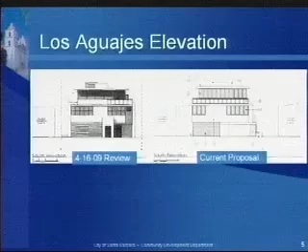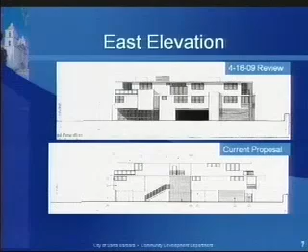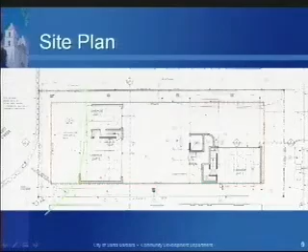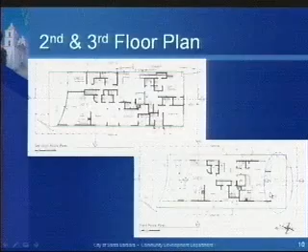And again, on the second floor plan, I'm still showing where the support column is here, and the stairway is at the easterly property line. On the third floor, I'm showing the encroachment of the deck and 3rd-story roof element that projects into that setback.

I just wanted to go back to the environmental review. We adopted a final mitigated negative declaration on April 16th, and with the implementation of the required mitigations that are outlined in that document that have been incorporated into the conditions of approval, all potentially significant impacts have been reduced to a less than significant level.

So staff supports the project, including the modifications, and recommends that the Planning Commission approve the project, making the findings outlined in Section 7 of the staff report, and

Thank you very much. The conditions in Exhibit A. Sorry, thanks.

Lastly, Pete, can we change?

The definition of neighborhood has been looked at in different ways during the course of our discussions on this project. The West Beach neighborhood, as defined by the general plan and the Historic Landmarks Commission, is along Shoreline Drive and Cabrillo Boulevard to City College, along City College to Cliff Drive, along Cliff Drive to Montecito Street, and then back to Chapala.

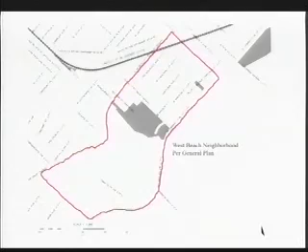That's one concept. While a smaller neighborhood, as defined by Policy 5.4 of the local coastal plan, is an area bounded by the half blocks between Castillo and Bath.

I believe Cabrillo Street. Cabrillo Street. I do know where I live.

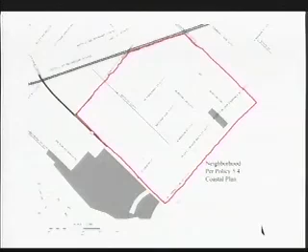Chapala and the north half block of Los Aguajes. However, it is my belief that the most intimate neighborhood, as defined in Section 1.1 of the Urban Design Guidelines, is the immediate adjacent developments

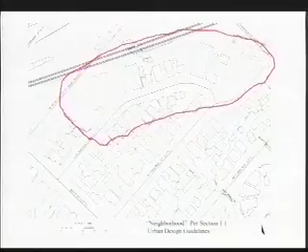And this, next plate, is a visual of immediate adjacent neighbors to my property.

Now, I'm pleased to present the project architect, Mr. Peter Allen, who will explain the architectural elements of our design solutions. I'll have a couple of closing comments after Pete's thoughts.

Thank you. Mr. Allen? Madam Chair, Commissioners, pleasure to be here today. I think we've come up with a solution that works for everybody, including us, which is great.

It's nice. Just in summary, I'll go through the site plan, show you where the modification occurs, and discuss how we worked with ABR, show you the amount of landscaping that we're doing, because I think it's impressive for this project. Quickly go through the floor plans just to show how we've integrated some items there. And then I have elevations of the building, 3D shots with and without landscaping, so we can see what the building looks like and then see how landscaping integrates with it.

One of the things we did, as Mark mentioned, was we added down in this area, and you'll see it on the landscape plan. This is the railroad lease area where we'll add additional landscaping and extend the creek buffer. But in essence, we've made the lot bigger and the building a little bit smaller.

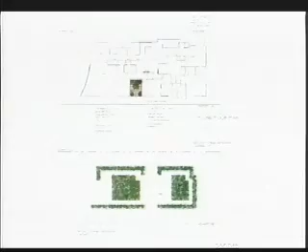Then up on the roof, we've got our green roof system. It'll be a palletized system around the perimeter. So if you superimpose this on that landscape plan, you'll see we've got a lot of landscaping involved in the project.

Second floor plan. I think what's important to note in the design is to look at the numbers. The size of the units hasn't changed; they're pretty much the same. What we've done is compress the building and made the center courtyard much smaller. We used to have two separate buildings that are now brought together. So the building is smaller. Maybe from a net number standpoint it's not, but from a physical standpoint, obviously it is.

What we have on all the units are foldable glass walls. This wall will essentially open all the way up, bringing the outside in, so this living area will essentially become a deck. There's real efficiency in the plan you'll see here and there, and on the third floor. Doing things like this, bringing those spaces together, really makes the architecture work, and you'll see in the elevations how it lightens up the design in the back.

Our focus on the design of these units, you'll see up on the third floor especially, is that the views are going out this way and this way. All the windows along this side of the building and this side are high windows for privacy.

Privacy is one thing that I forgot to talk about. Commissioner Larson especially asked about privacy in relationship to the apartment buildings next door.

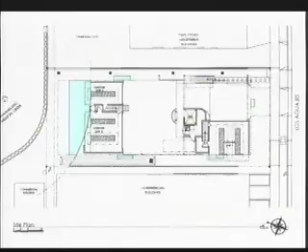And you'll see in the landscape plan, we've integrated landscaping along the side, bamboo and a large plant down the side of the stairs, to really get a privacy separation for this building right here.

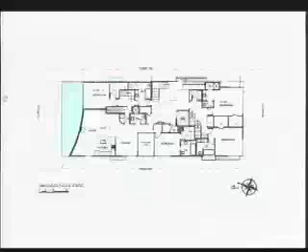This here is the protected patio I just mentioned in the landscape plan for unit number 3. This provides the acoustic separation required for this flat. These are modifications that we eliminated last time.

We had stairs on both sides; each unit would have its own stair. We've combined them now in the center of the building to eliminate those mods. It's not the most ideal scenario, and I still need to work on this, but it's certainly solvable, and we'll get it done.

Up on the third floor again, showing what our encroachments were before. This was a large planter. This is where this unit came out into what used to be a 15-foot setback, now it's a 20-foot setback.

So that's what we've gotten rid of. This area here is where, obviously, a mod is being requested — really for the use of the deck, not necessarily a building, because this could be a roof and it wouldn't require a mod. So it's specifically the use, and I think staff would agree with me on that.

And then up on the roof, we do have some roof overhang that goes beyond the 2 feet that's allowed. So those are them — those are the mods.

You'll see here on the third floor, just to emphasize, this is a glass wall that opens this area up, and this is a folding glass wall that opens this other area up. The view really focuses out this way, with the mountain view like so.

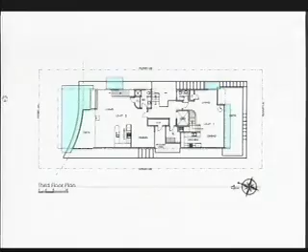So we have glass in this corner, as you'll see on the elevations, but it's set back — the footprint of the adjacent apartment building is back in this area. So privacy is something we considered the whole way along and have still maintained.

This enclosed patio is the acoustically protected area for this unit, and the acoustically protected area for this unit is on this deck here, because all the noise sources are back there, as long as you stay over here.

Roof plan showing how much green roof we have. This is the area we will have our photovoltaic system. This is where we have our roof access.

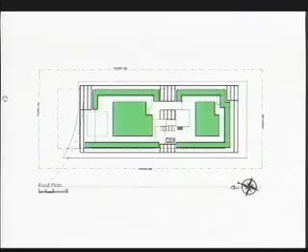The staff report, as part of the comments ABR had, was we used to have an enclosed roof access up here, making it easier to climb up and get these palletized green roof system up there. They just really pushed us to get everything off the roof, so we did.

We'll have to come up with an engineering solution. It'll be fun to figure out a way to get that to all work. But we did, at ABR's request, lower all that stuff.

Also kept the edge of the green roof back from the edge of the roof so we can maintain that nice thin line you'll see in the elevations. That's very, very important to this style of architecture.

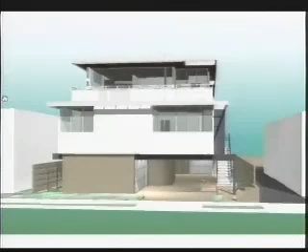So here we'll start off with the elevations, both with landscaping and without.

Working with ABR, they want us to reduce the amount of plaster mass on the front of the building. Used to come up here, and so we have made it much more horizontal now. There's our glass walls that open up.

This is translucent glass on the deck railing, so it provides privacy, yet still very light. We recessed the garage back about 8 inches to get a nice shadow line along here.

And what you can see here, it's important that you can look in this elevation, is we got a nice, good, pedestrian access. It's very obvious. It works. It ties in very well. Our spider leg comes across and frames it.

We were even able to get landscaping down here underneath, and also landscaping back here to really protect the view of those cars.

Coming down around the side, we have a fence running the entire length for privacy. Right here, that's the mod, half of the stair popping out. There's the decorative screen wall I was talking about that provides privacy from this courtyard area to the apartments adjacent.

But what the elevation shows is how we're able to really simplify this, refine it, and give it its apparent height really comes down by these very strong horizontal lines that we've got.

And this is what it looks like with landscaping. We'll have a nice large plant here again, kind of screening that stair coming down.

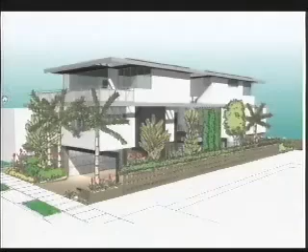This is coming around the back. You can kind of see here are our decorative fences, and the back of those garages are open. So we have a very light piece of architecture here.

And then these are the folding glass walls here, and up here on the third floor deck, that'll open up and just make this really nice and light.

But you can see there's a lot of opening on the massing down in here. It's all open down under here. So the building is very light, works very well.

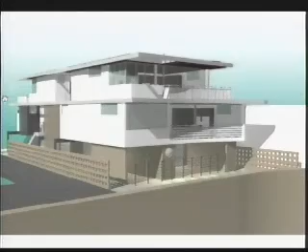And then up here in the corner, we do bring the glazing around just because that's where the view is. But you can see how high the windows are. And bathroom windows such as this are oriented away from that adjacent building.

And here's what it looks like landscaped. So the cars are screened back here.

Around the other side, you can see how we've kept the windows high. Even though we really don't have a privacy issue with the commercial building next door, there's a potential for that in the future. And again, we're focusing really the views and the openness on both ends, the front and the back of the building.

So it looks like landscaped. That's why this is where our bioswale occurs, so really you're not going to see any vertical massing there.

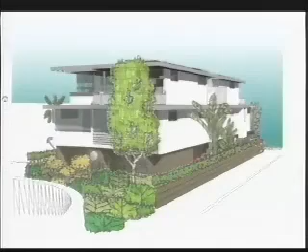Last shot, and with landscaping, really showing how horizontal and low, long and lean the building has become, and how open it is in here, how open it is down there.

You can see just the tail edge of the green roof and the tail edge of our condensers up on there. But when you're down at ground level, those certainly actually will not be visible.

So, in summary, just wanted to let you know we worked diligently with ABR to refine the project and to come up with something that works for everybody.

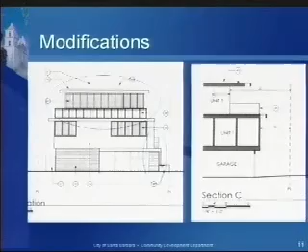Correct. You don't subtract out staircases and stuff? I thought staircases only count on one level, but no. And then the top one would be done the same way?

No, no. It's internal floor area. So it's really not comparing apples to apples - it's a different kind of calculation to figure out the net footprint and the net square footage of the third floor. Correct, but it's specifically written as footprint.

If a different calculation had been made, there would be a 15-foot setback for the whole building. And instead, they get a 10-foot setback at the front. Correct.

Mr. White? Well, I'm done. Thanks. Let's go through that again. Madam Chair, Mr. Vincent, I will read you the zoning ordinance. Okay.

The setback section regarding three-story buildings or structures: the general rule is a 15-foot setback for the front setback. However, if the net floor area of the third floor is less than 50% of the net floor area of the first floor building footprint, the front setback shall be reduced so that the ground floor is 10 feet, the second story portions are 10 feet, and third story portions are 10 feet.

To answer Commissioner Jacobs' question regarding the third floor, it is the interior space, the net floor area. As we've had discussions before, that is the enclosed floor area inside. So the cantilevered roof is not net floor area. And that's what the ordinance says.